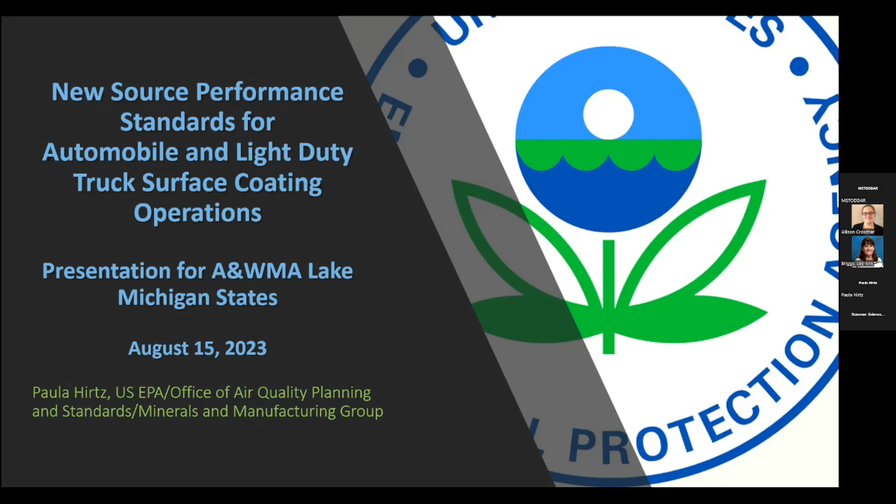For this presentation, it provides an overview of the automotive industry, and it summarizes some of the rulemaking development, the technical aspects, and also the tribal and demographic analysis. I thought I'd go ahead and add that in also, so we can talk about that.

This was a presentation for Region 5 for the permitters to walk through the plant, and there are a lot of new employees, so I got together with Region 5 and we provided this training to the new employees before they went out into the plants.

It was a little intimidating doing a review of the auto industry because it is very dynamic and it's experiencing a lot of growth. We did identify 45 auto assembly plants subject to the current NSPS and the auto NESHAP. Almost half of the 45 plants are in Region 5 states. Michigan, Ohio, and Indiana had a lot.

There's a lot of conversion to electric vehicle production. In 2022, we became aware of the construction permits issued to the Ford Blue Oval City mega campus in Stanton, Tennessee, VinFast here in Moncure, North Carolina, that's not too far from my house, and Rivian in Atlanta, Georgia. Also in 2021, Tesla started limited production in Austin, Texas.

So lots going on. At proposal, we determined one plant to be a small entity. It was the old Lordstown, General Motors Lordstown plant, which was then Lordstown Motors in Lordstown, Ohio. We determined it was a small entity due to the number of employees, but it was ramping up production, so that was just a temporary situation.

Lordstown Motors was sold to Foxconn in May 2022. And since Foxconn is not a small entity, we determined there's currently no small entities in the category.

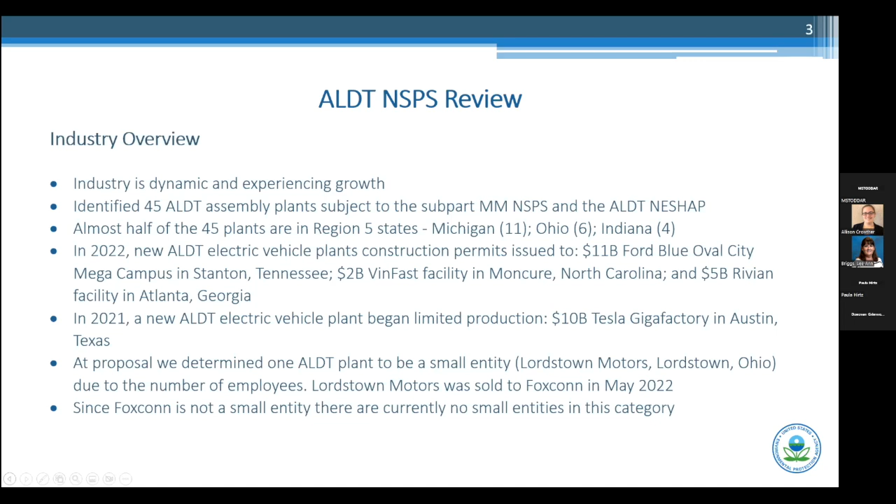As far as regulatory and emissions, most of the facilities comply with the NESHAP by using reformulated low-HAP coatings and not controls. But most of the facilities comply with the NSPS VOC limits by using control devices. The facilities emit more VOC emissions than HAP emissions from their surface coating operations due to the reformulation of coatings to lower HAP content. And also, we did delist a few HAPs such as MEK, which they use in their solvents.

VOC emissions, according to the NEI, are about 20,000 tons per year. A third of the plants we found had lower VOC emission limits in their permits than the NSPS due to new source review PSD BACT or LAER determinations. And these were mostly due to new sources that were constructed at existing plants.

These facilities emit more VOC than other criteria pollutants we determined, and we determined that the emissions are relatively well controlled. PM from paint overspray is well controlled by the filtration systems. Lead's no longer used as a pigment in coatings. The other criteria pollutants from combustion sources are relatively low compared to other source categories. And the source category was not a significant source of GHG compared to other source categories.

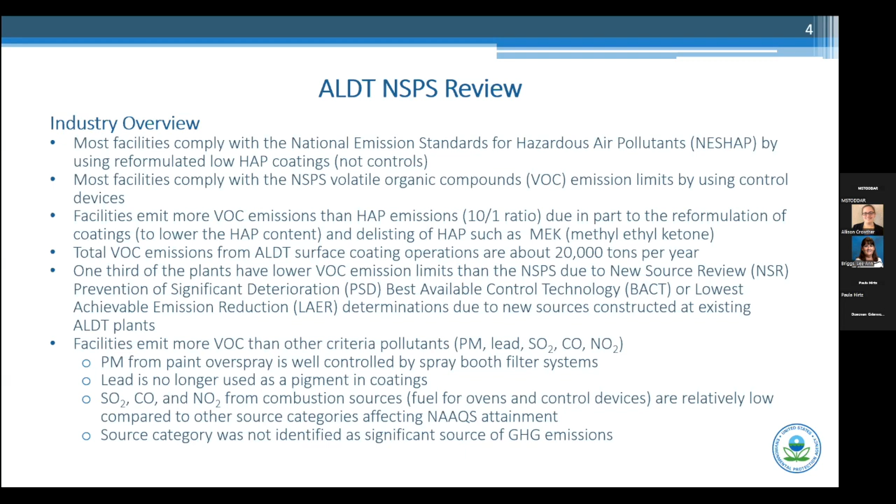A little bit about the surface coating operations. The coating process starts out with a zinc phosphate system, this is not subject to the NSPS or the NESHAP.

It proceeds to 3 primary operations that are covered by the NSPS and the NESHAP. It basically cleans the vehicle to remove particles from the body shop, and it provides corrosion resistance and promotes adhesion between the metal and paint. It's also referred to as a pretreatment or conversion coating.

The first operation that's covered by the NSPS and the NESHAP is the prime coating operation. It's an electrodeposition coating process. I don't know how many of you are familiar with automotive coating operations, but it's a tank, a large tank using a waterborne paint. The process is a dip tank, a series of rinses, and a curing oven, and it provides corrosion resistance and surface preparation.

Ford refers to it as the E-coat, GM the ELPO, or it's referred to as cathodic deposition in the industry, and it is an affected source.

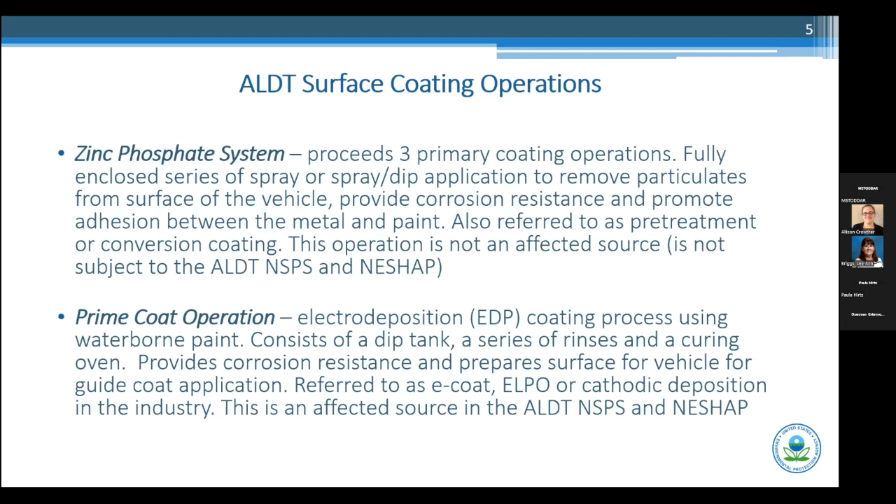The two major operations are the guide coat operation, or the primer surfacer as it's referred to in the industry. This is an affected source, and also the top coat operation.

These operations are fully enclosed, spray application operations. The guide coat prepares a surface for top coat, and they both consist of downdraft spray booths and ambient flash off zones and a curing oven, traditionally.

The downdraft spray booths act as a particulate control system to capture and control paint overspray and solvent emissions. The water containing overspray is routed to the wastewater treatment plant, and organics from the spray booth and oven may be routed to a control device for the guide coat operation - not always, but usually for the top coat operation. The guide coat may be solvent-borne or waterborne coating, and is applied electrostatically using HVLP spray guns with automation.

Basically the same process goes for the top coat operation, except in the top coat it's usually a long spray booth. A pigmented base coat is applied for the top coat operation, followed by application of the clear coat. That can happen in a longer spray booth or two separate booths.

There are other surface coating sources. Paint shop sealers are applied in the shop, in the paint shop. The sealer application is an affected source in the NESHAP.

There are solvents that are used throughout the shop. Solvents are added to all the paint to bring them to a specified viscosity, and solvents are used throughout the shop for cleaning and repair.

Operations that use solvent are subject to the work practice standards in the NSPS and the NESHAP. Then there is the paint mix area where the paint is stored, and the paint is circulated back to the booth from the paint mix area and back to paint mix. The paint mix area is subject to work practice standards too.

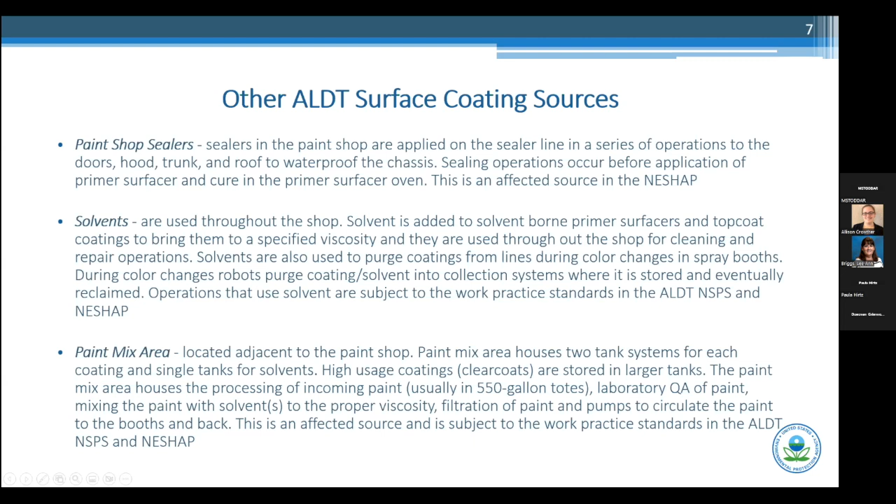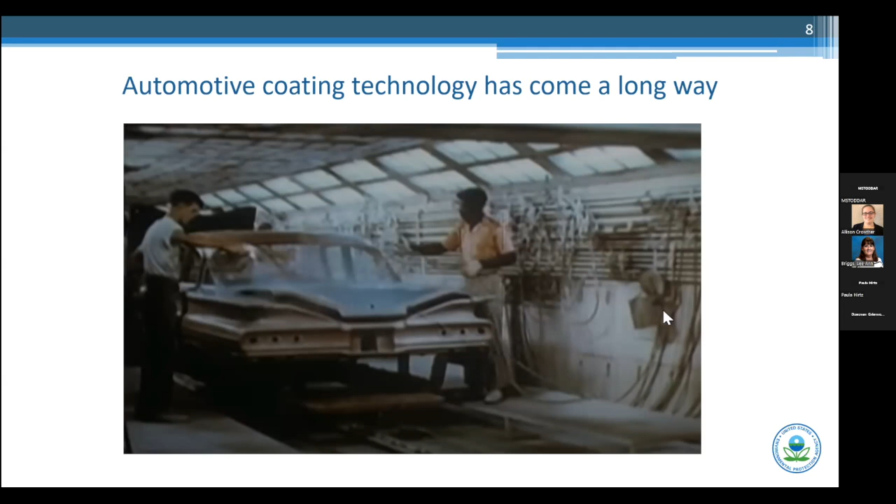I did ask Mark if we could take a little time to review this video, and I think it will work - I'm going to go ahead and give it a try. For about 6 minutes it will show the body shop. If you've never been in an auto assembly plant, it's pretty fascinating. It shows the body shop and the coating operations. I'll go ahead and start it, and stop it before it continues - you can watch the rest of it. It goes through trim and chassis if you can watch it later.

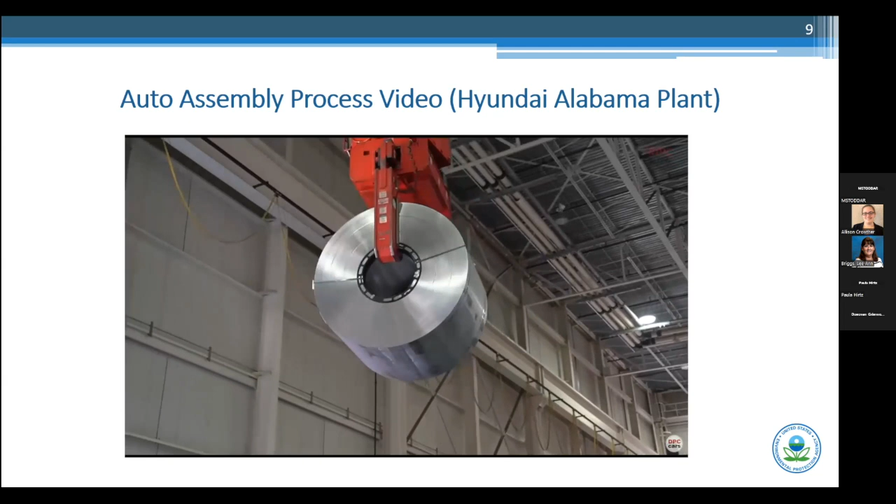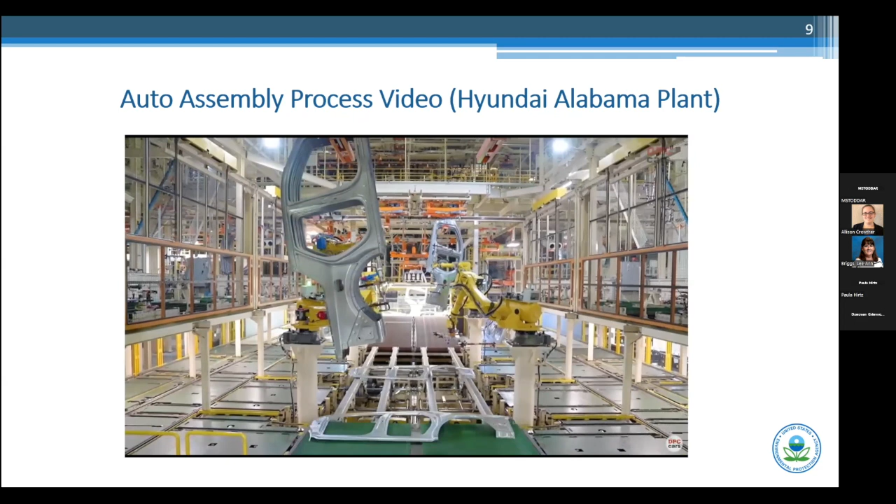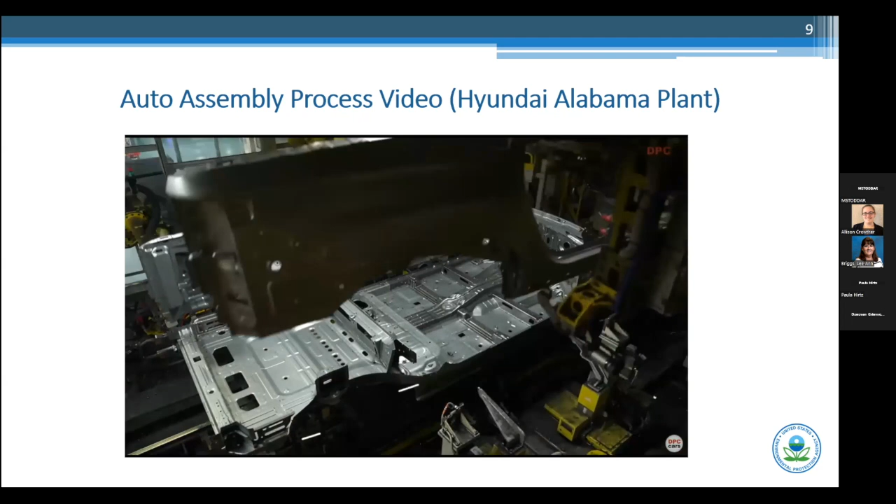The Santa Cruz marks the first HMMA-built vehicle that originated right here in Montgomery, Alabama. This vehicle is not being built anywhere else in the world. My fellow team members, we are the parents of this innovative, stylish, and functional sport adventure vehicle. It's truly a limited edition that we can all call our very own. Vehicles produced by HMMA will be compared to all others. We want to show the world that the best quality and safest cars are produced right here in Montgomery, Alabama, and to be recognized as the best automotive manufacturing plant in North America. The Santa Cruz is unlike any vehicle on the market today. I have had the pleasure of driving one myself for the last several weeks, and I'm now more excited than ever to present this sports adventure vehicle to our customers. The many options of the open bed combined with the comfort and security of an SUV is going to appeal to drivers in a whole new way.

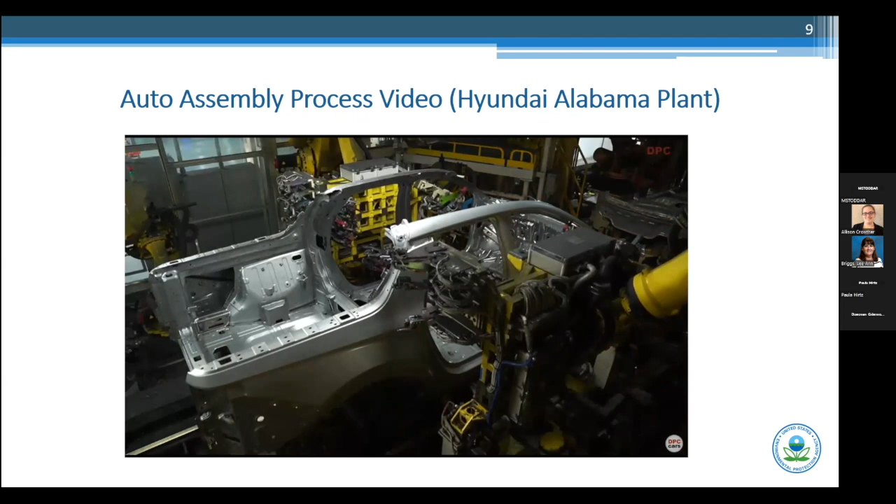There's robotics for the major welds now.

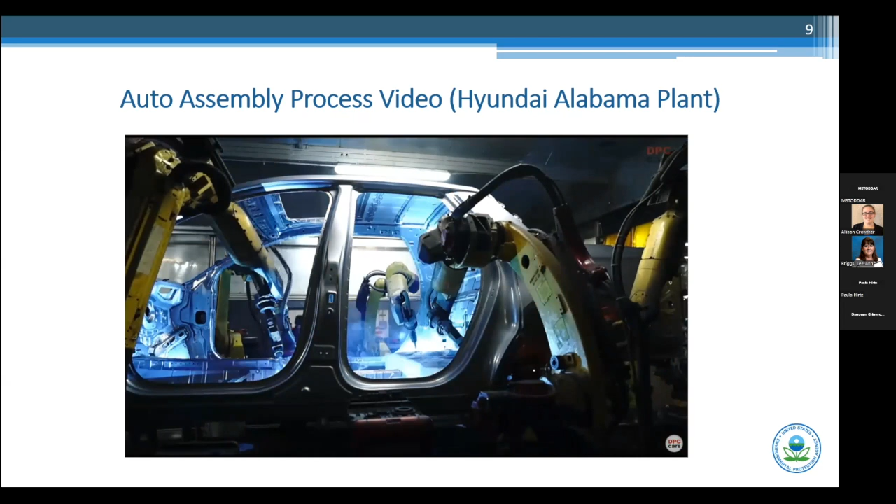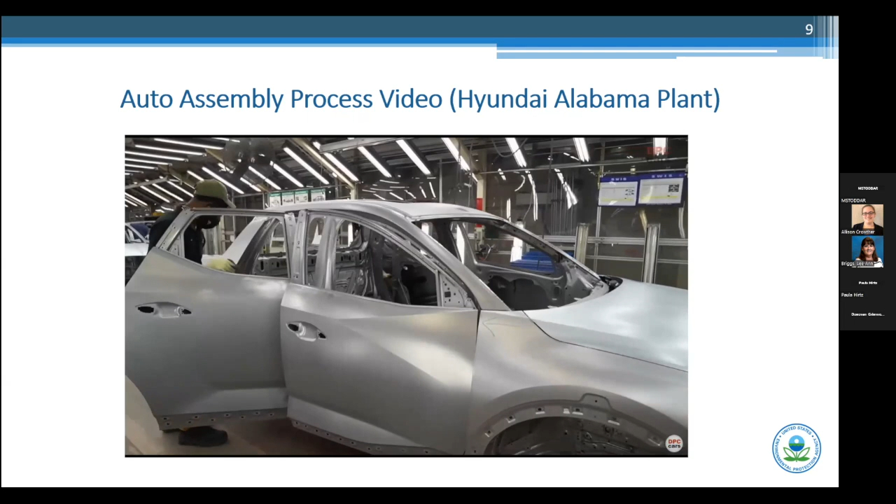But they still do a few things manually.

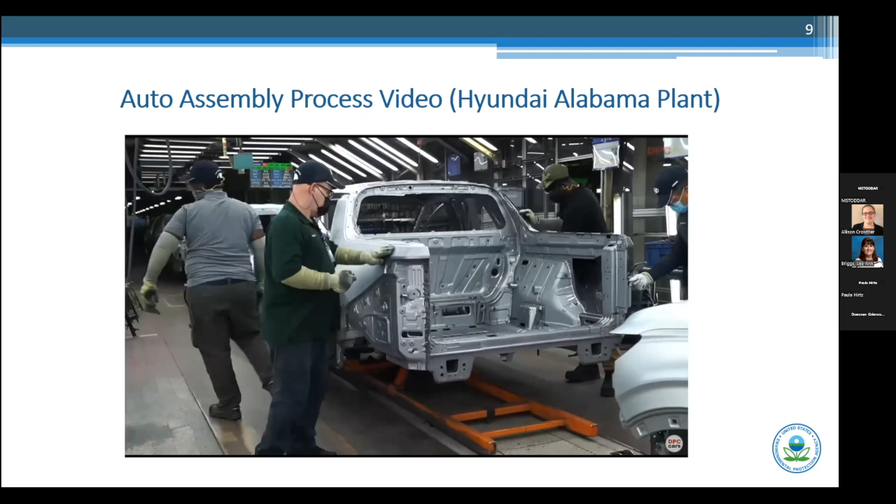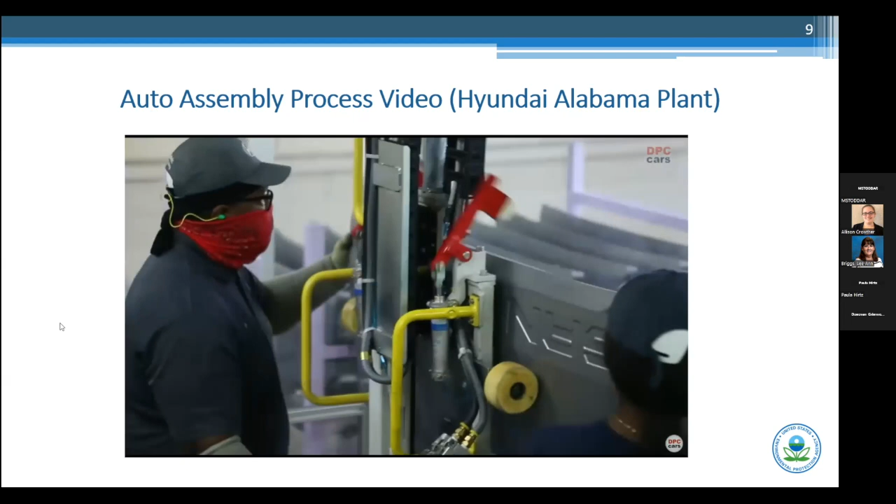They don't have to oil the parts if they stamp them on site. When I worked in the industry, the parts were oiled, and that was always a problem for painting. And of course, now these can be aluminum or sheet metal.

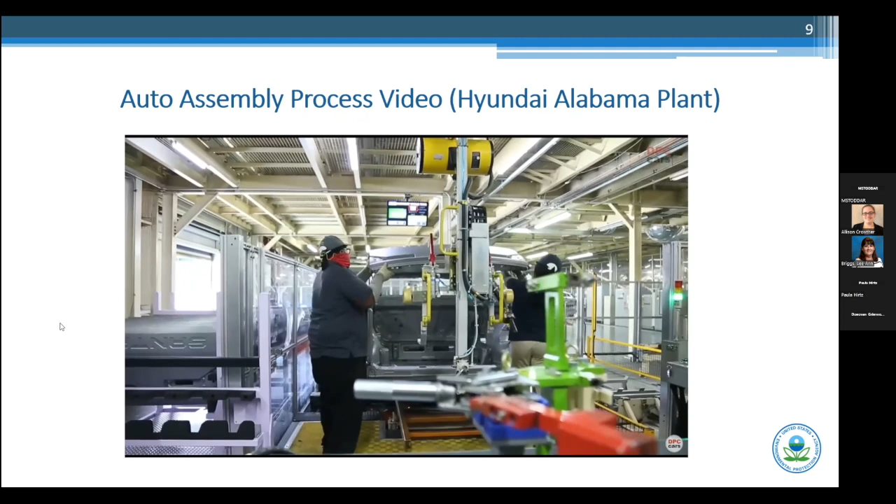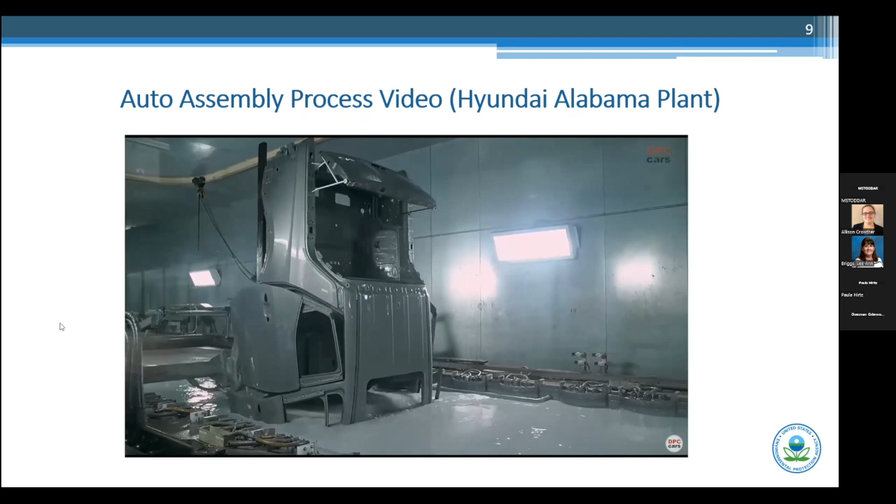Okay, so there's the E-coat process. It's gone through the zinc phosphate process, and they dip it so that it gets into all the recesses of the vehicle, deep into the interior to prevent rusting.

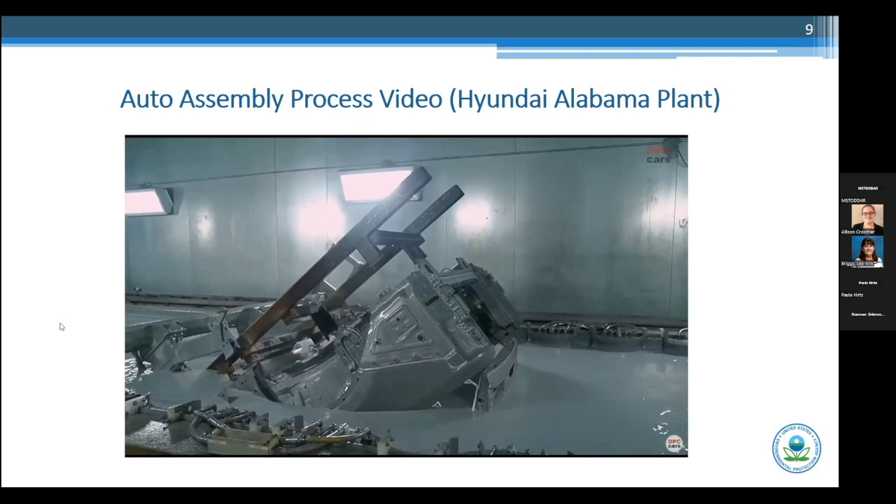And that's all that you can see - those are the cells on the side. The body is charged negatively, and the cells on the side are positive, and it draws the waterborne paint to the surface.

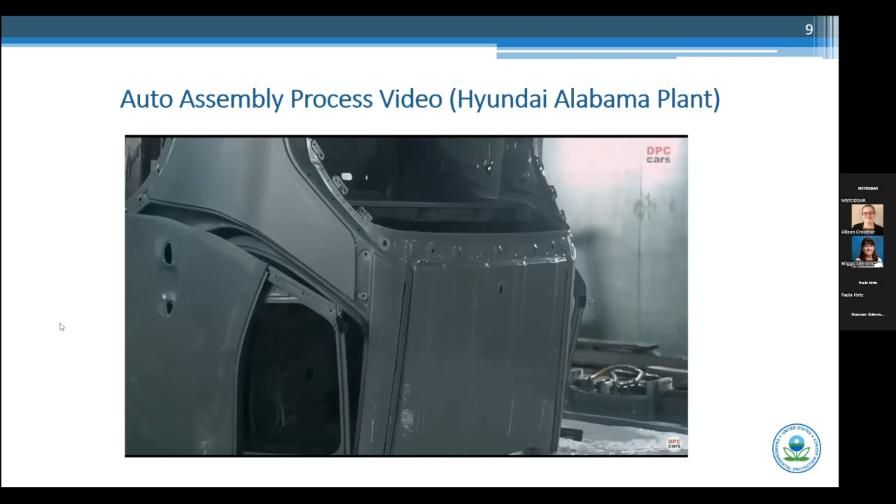Usually the dip tank is not controlled. It doesn't have any controls. There's a couple of plants we found where the dip tank was controlled, but we found that to be not cost effective for the NSPS.

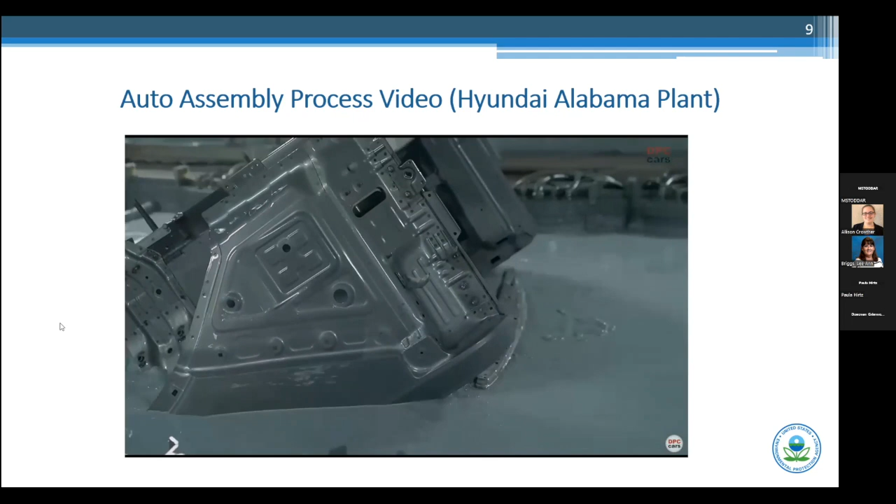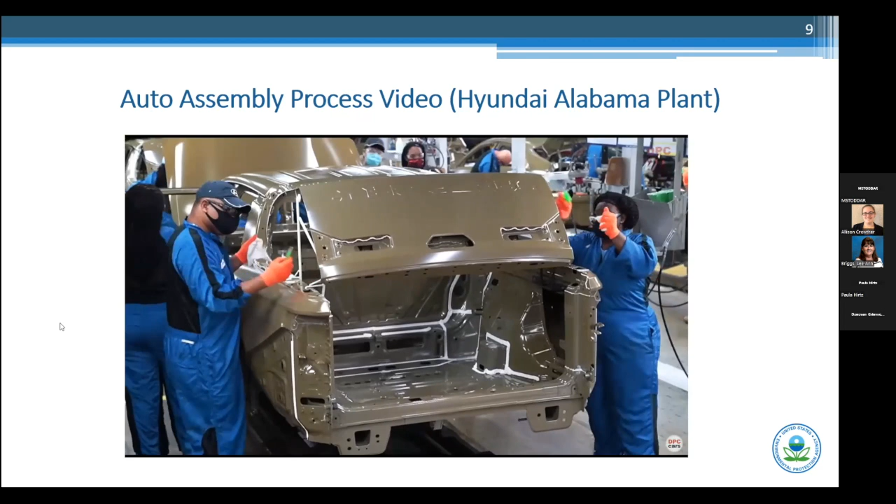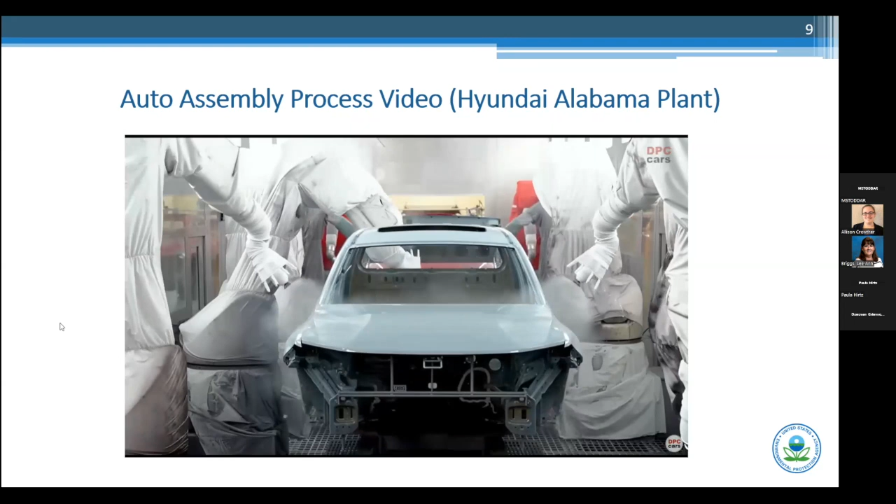And the top coat, this looks like it's spraying this white color. And those are Behr bells, rotating Behr bells, BEHR bells. So it's a lot more efficient process now. Everything's programmed.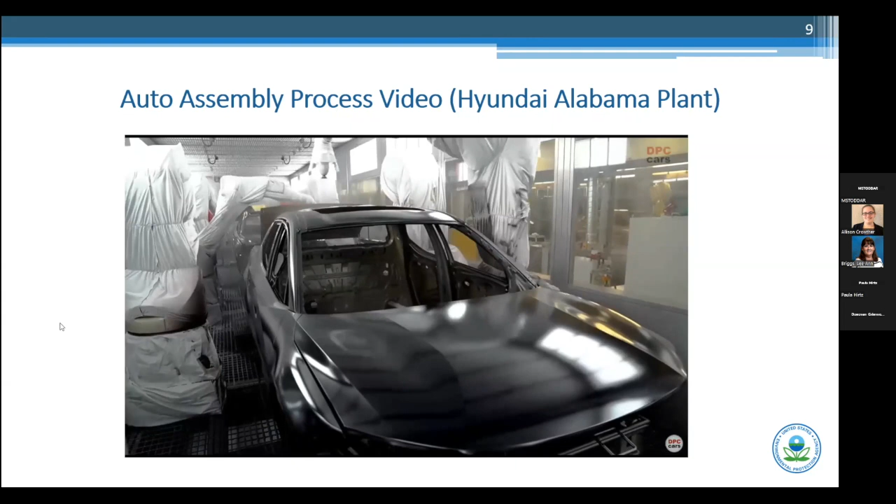That looks like, I'm not sure if that's clear coat. It looks like clear coat on top of the black body, yeah. But everything is wrapped, so it protects the robot, and it doesn't have to be cleaned with solvent.

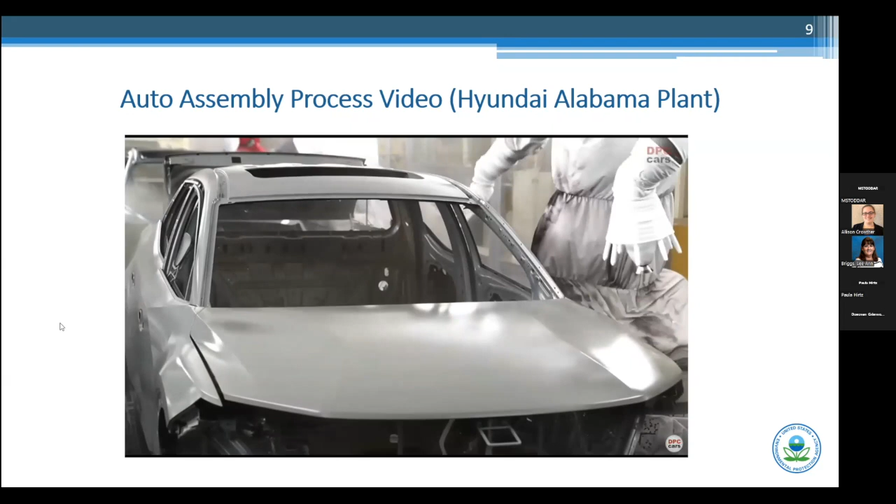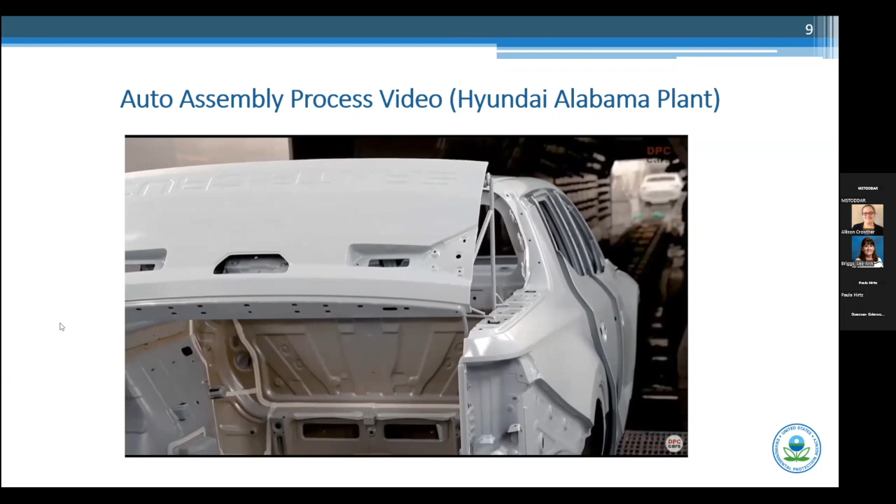So there's still manual sprayers. They'll open the doors and spray the inside of the door jambs, but it's robotic now. A lot of robots now, and I think that was a subject on this morning's news.

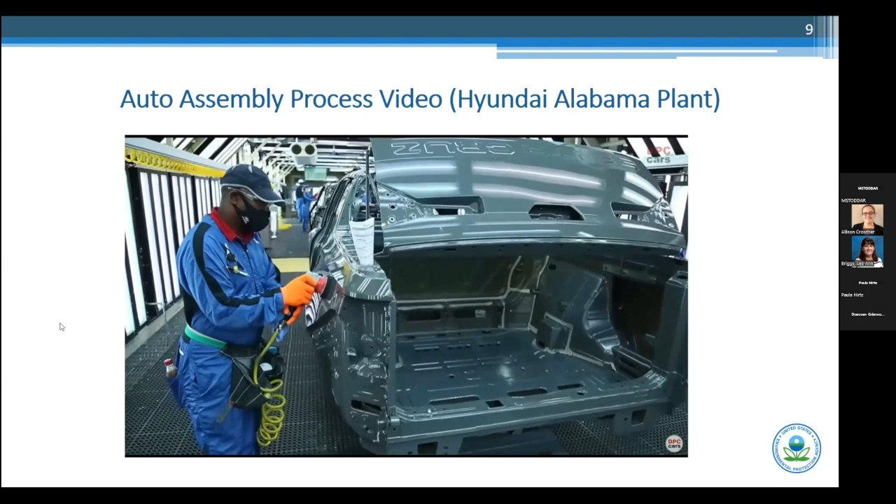This is inspection and spot repair. And the solvents that are used to wipe down, or any solvents used by these folks, have work practices.

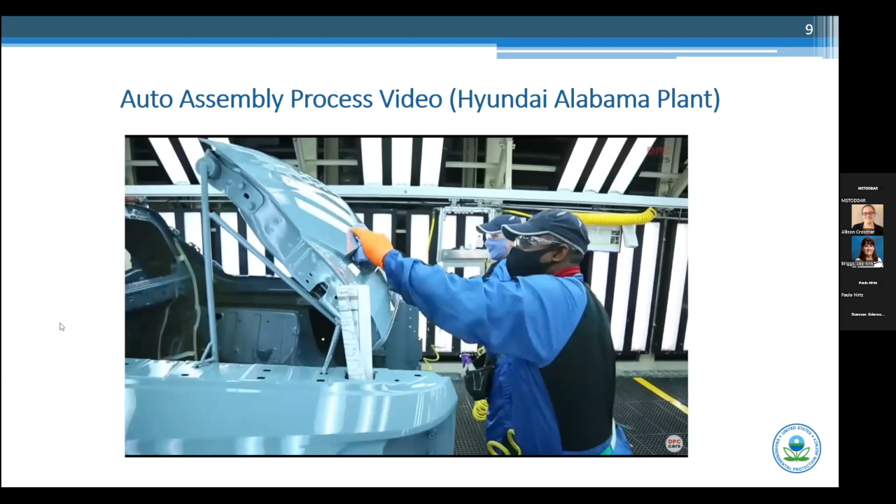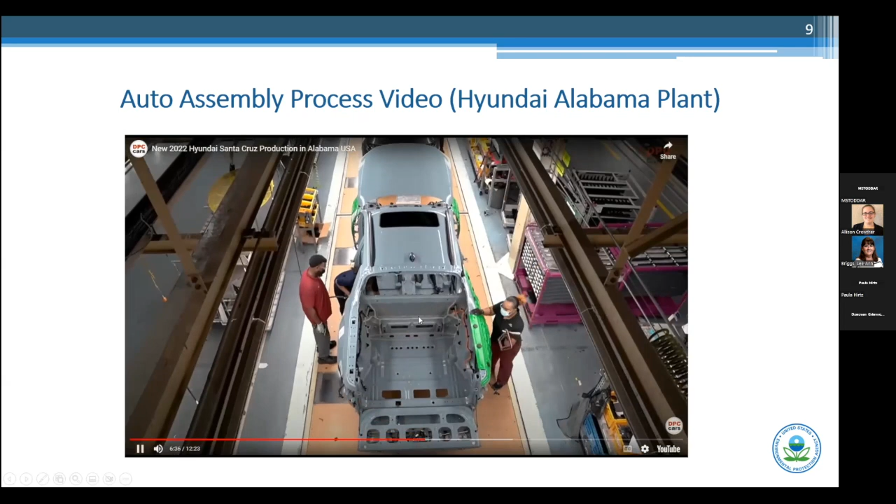And I think I'll go ahead and stop it there, but you can watch the rest of it. From here on out, it goes through the rest of the plant, and it has protective covers on the paint. And the doors are put on by robots, so that's pretty fascinating to watch too.

Okay, great, that worked.

So as you can tell, there's been a lot of surface coating developments. In 1980, the coatings and the coating processes were still under development, and some plants couldn't meet the NSPS limits. The industry converted to base coat, clear coat paint instead of waterborne paints, as we had anticipated when we set those limits. There were innovative technology waivers issued for 9 plants because they could not comply with the NSPS limits for top coat. Today, plants are achieving limits that are much lower than the NSPS levels.

Back in 1980, they were still using a lacquer, and they were using the 2-stage enamel top coats. They used mostly solvent-borne coatings. Only 2 facilities used waterborne coatings at that time. There was no control of the prime coat operation, but the top coat operation was controlled. And they actually did have manual and automated electrostatic spray application back then. Today they have robots.

Clean Air Act Section 111 requires a review of the best system of emission reductions, or BSER, every 8 years. Of course, we missed that. It was more like 43 years since we took a look at the auto NSPS. We did have a consent decree order. We actually had a consent decree proposal deadline and final deadline.

Here, just kind of added the BSER requirement under 111B1B and the general provisions definitions of reconstruction and modification.

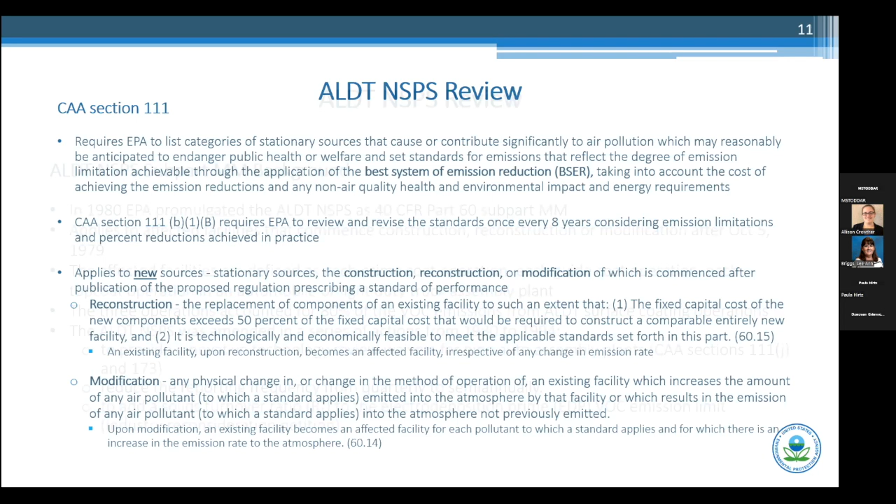So the NSPS Subpart MM had specific applicability to the 3 primary operations in assembly plants. And it applied to facilities that commenced construction, reconstruction, or modification after October 5th, 1979, which was the proposal date. The 3 operations account for 80% of the VOC emissions.

And the NSPS was amended in a series of actions. First of all, to provide the innovative technology review waivers, to reduce the reporting frequency from quarterly to semi-annually. And then the industry petitioned us to add a solids turnover ratio to the electrodeposition prime process. And that was mostly to account for periods of non-production.

Subpart MM emission limits were based on control scenarios for both solvent-borne and waterborne coatings. Also based on no control of the E-coat and guide coat, and it contained various exemptions. So if you used waterborne, basically no controls were required. Waterborne was thought of as a pollution prevention coating or practice. And then alternative 2 was control of not the guide coat operation, but the top coat operation, both the booth and the oven.

The NSPS also exempted plastic coating of all plastic bodies and body parts on separate lines. There was no separate limits for modified sources.

The industry would like less stringent limits for modified sources. The original NSPS did not have those separate limits, and they had some breaks on model changes. Those were not considered to be modifications. The NSPS required use of default transfer efficiencies in the rule. It did require that emission limits be met at all times, which is good. A lot of NSPS don't have that condition.

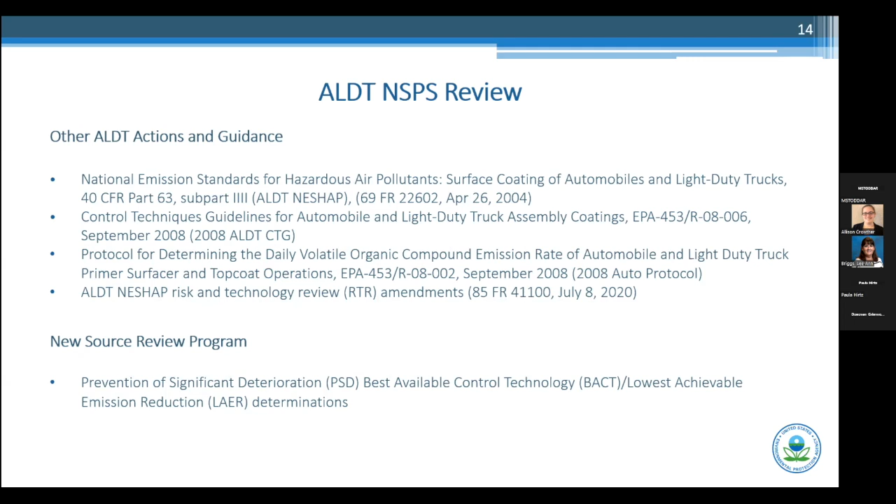The new Subpart MMA was proposed in May 2022 and had a 60-day comment period. As you can see, the VOC emissions are much lower, and the updated BSER describes how auto plants are achieving the emission limits and how the coating configurations really vary. The prime coat, guide coat, and top coat limits are very low. BSER for the new subpart was based on one control scenario for the prime coat and top coat operations, and two equivalent control alternatives for the guide coat operation, depending on the use of waterborne or solvent-borne coatings.

The configurations vary widely from plant to plant. We basically described the prime coat operation at plants that were achieving the 0.23 level above - this is what they did, they basically control the oven emissions. For the NSPS for MMA, this is what the BSER is to achieve the 0.23. Guide coat had a couple of different scenarios, one for waterborne, one for solvent-borne, and top coat is both waterborne and solvent-borne.

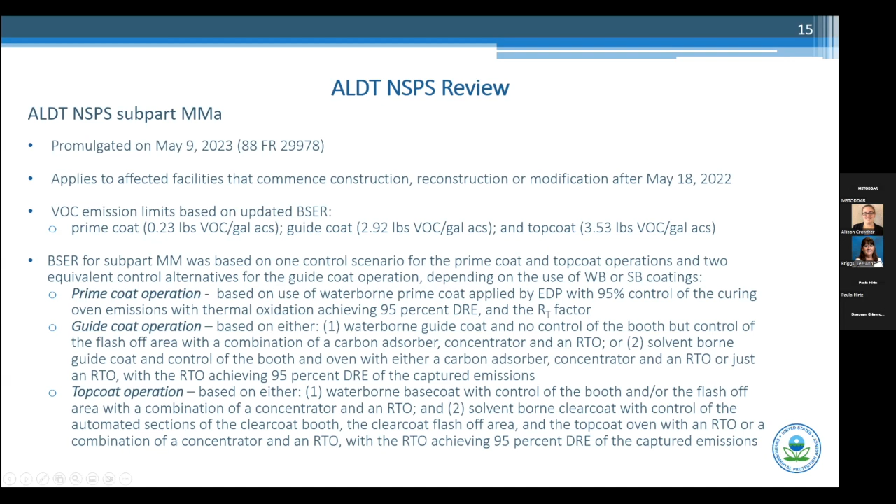For MMA, we allowed no exemption for the coating of all plastic vehicle bodies. Really, the only all-plastic vehicle body we were aware of was the fiberglass Corvette at the Bowling Green, Kentucky plant. So they will be subject to MMA if they modify, build, or reconstruct.

We added requirements to harmonize the NSPS with the NESHAP. We added work practices to minimize VOC emissions. We updated the control devices and all the testing and monitoring requirements. We required periodic testing of control devices. We revised the transfer efficiency provisions so that plants have to test the transfer efficiency - they can't refer to just a default transfer efficiency anymore. That's the same as the NESHAP.

We revised the record keeping and reporting requirements. We added electronic reporting. We clarified the startup shutdown malfunction provisions. And we added a whole ton of new test methods and incorporated ASTM methods by reference as alternative test methods.

The only thing we did to the existing Subpart MM, we call it the legacy Subpart MM, is that it applies to affected facilities that commence construction, reconstruction, or modification after 1979 and before the date of proposal for MMA. We did add electronic reporting provisions to MM so that plants currently subject will submit electronic reporting of their semi-annual compliance reports and test results if they do testing.

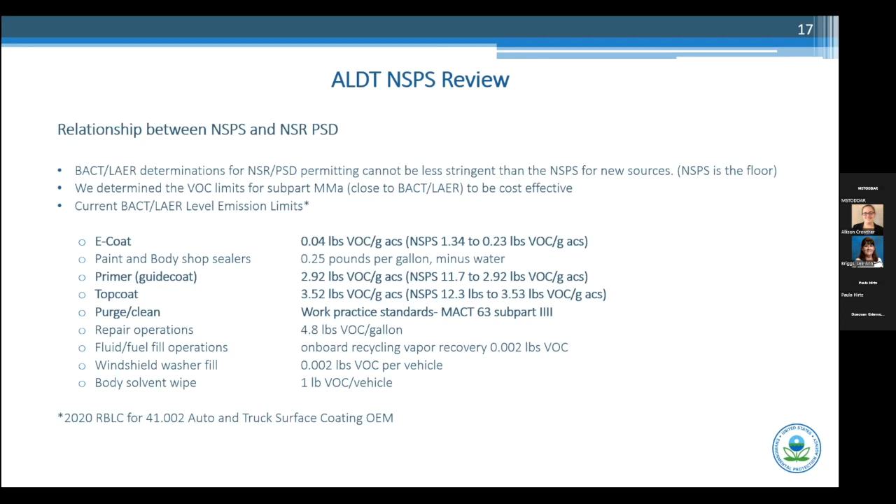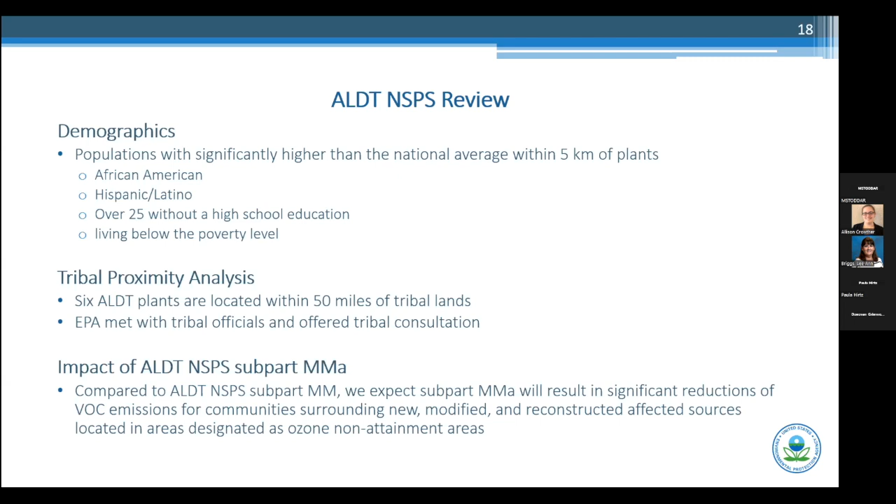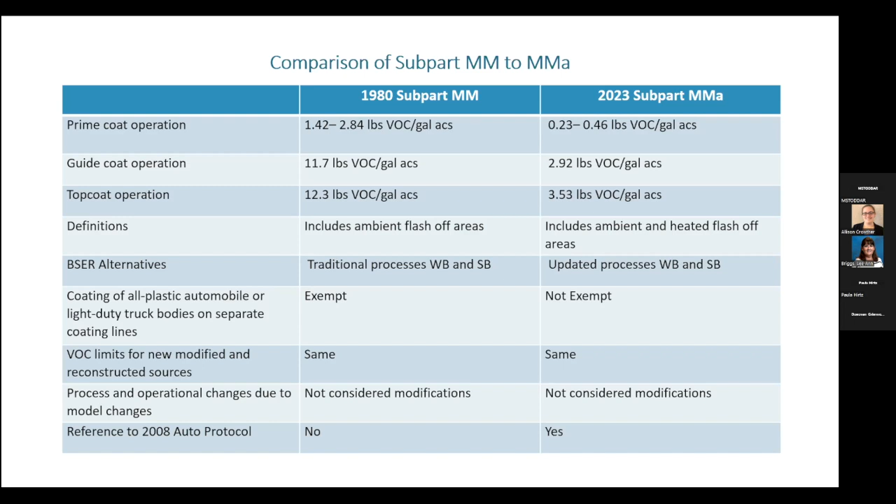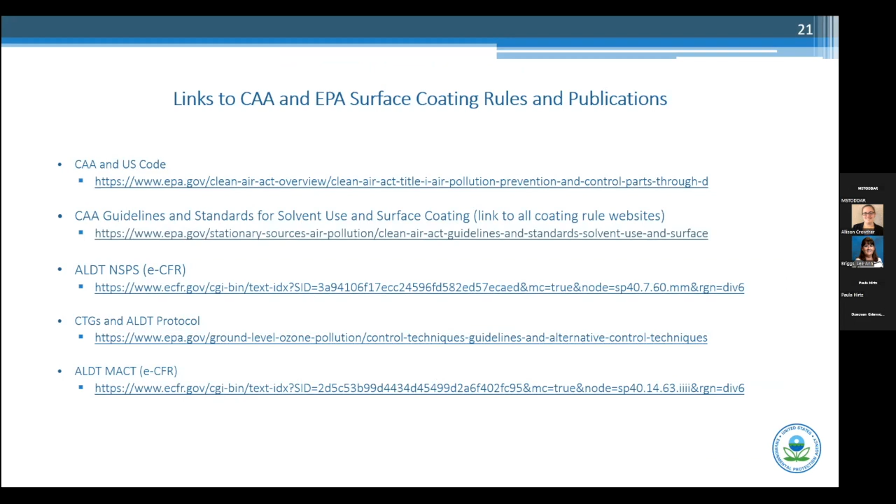That's it. I did want to thank my contractor, ERG, Brian Palmer, who did a lot of great work for me. And I wanted to especially thank Dino Blathris, who works at US EPA Region 5 in the permitting section, and Bob Burns with Michigan Department of Environment, Great Lakes, and Energy.

I also included some additional background information, prepared for the permitting folks. It has the Clean Air Act requirements we had to consider and a summary of the CTG. I won't go through it, but if you want to know more about what's required and what we had to review, it's there.

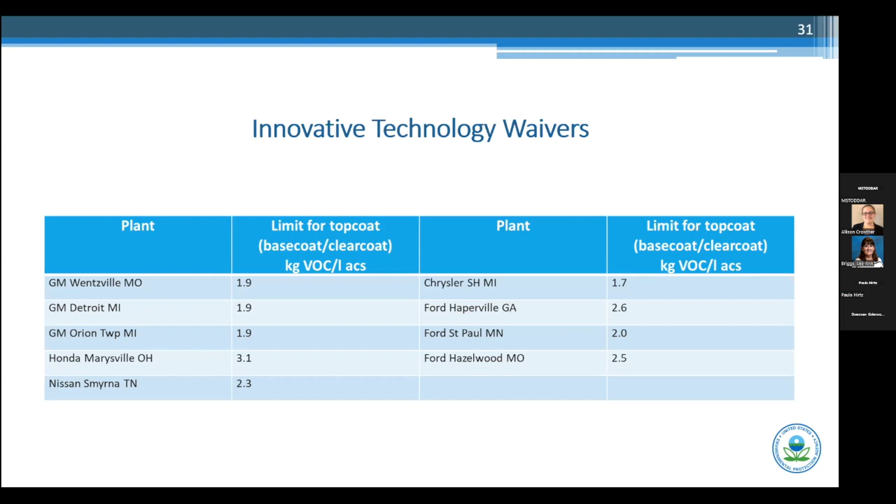For these innovative technology waivers, the facilities had closed in 2006. This is in kilograms per liter, so it's a little different than what I've shown you in the presentation, but I'm going back through that.

Any questions? Yeah Paula, we do have one from Sherry Waldron: is the transfer efficiency a per gun requirement or a type of gun, and was there a lot of work that indicated the transfer efficiencies would vary a lot?

It's per operation, so you might have a variety. When you look through the rule, I believe the NESHAP is the same way. But for the NSPS, say for the guide coat operation or the topcoat operation, you may have different guns that you use. For topcoat, you can have electrostatic, HVLP, manual, automatic, and even conventional - believe it or not, the industry assured me there's still an application for conventional. Basically it's an averaging of transfer efficiencies used on that operation.

I was going to say, believe it or not too, for metallics - I don't know if this is known - the metallic flake, if applied with electrostatics, disrupts and causes a darkening. So for the metallic coating, they have to go back over with conventional non-electrostatic spray before the clear coat, so it brings it back on color. That transfer efficiency, which is low, gets averaged in with the other transfer efficiencies that are high, and they're all averaged together.

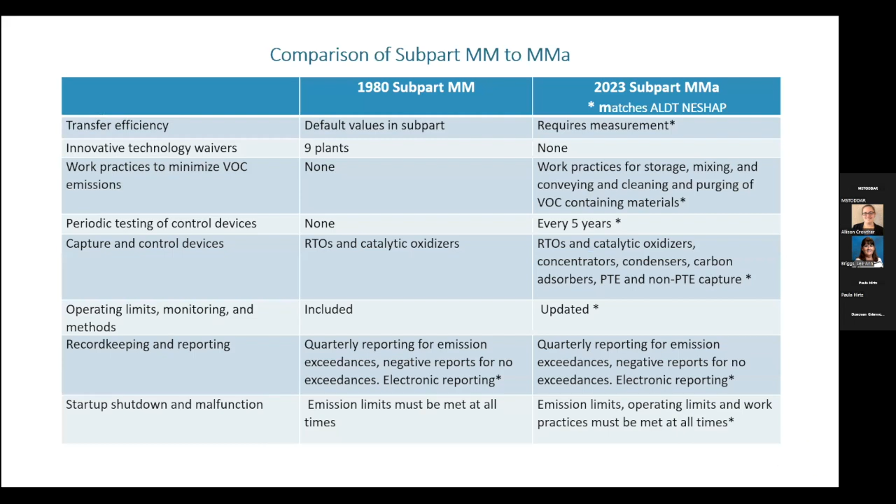Anyone asking questions other than me? Tony is asking, how does one get an innovative technology waiver? Are those available for NESHAPs as well? I'm not sure about 112. I suppose there is some provision, we could go back to it.

The industry actually asked me if that was still available, and it is, under 111. Here it is, 111(j) and 173. If you read Subpart MM, it actually has 9 plants listed in the rule. It was added as an amendment, and it has a different limit, saying they were permitted temporarily to emit until they could achieve the NSPS limit.

I believe the NSPS was promulgated in 1980. 1984 was about the time the waivers were granted, and then I think it was 86 — they had just a couple of years, or until they could meet the NSPS limit. So it was a little bit open-ended. It was so long ago though.

I had concern about that at first, but when we took a look at the semi-annual compliance reports for each of those facilities still operating, we found that they were way below NSPS limits now, and that's why the VOC limits are so low. We saw that these plants, which couldn't meet the limits at one time, were now way below, achieving what we proposed, which helped solidify that those low numbers were attainable and achievable by many.

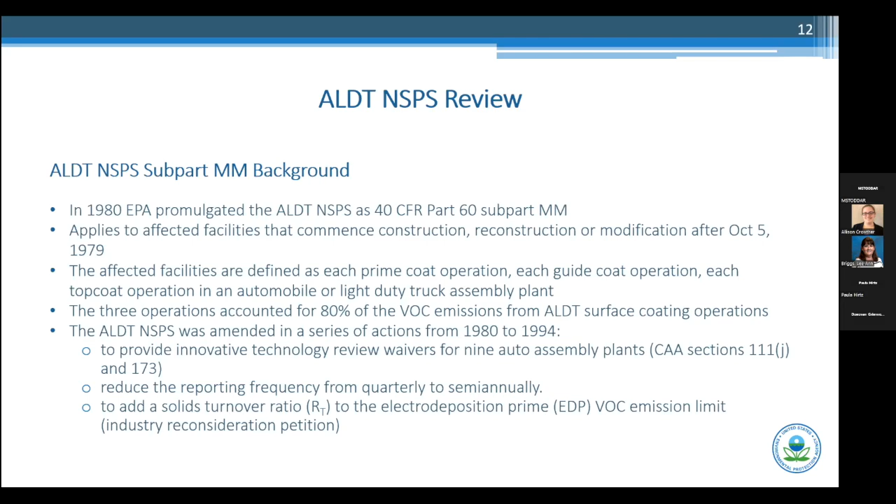Oh, did I sign off? Yeah, I can still hear you. Okay, let me.

Yeah, I'm not sure about that, we would have to look into it. I would think that the emissions would be more concentrated, into one location, if you're doing the major body welds, and maybe they are more concentrated, coming from that particular station instead of throughout the body shop. I'm not really sure about the body shop operations though.

Yeah, everything is becoming more efficient at auto assembly plants, I do believe though. I'm thinking with robotic welding, you could be more precise, whereas a human being might be prone to some degree of error. Absolutely.

The main goal in the body shop is you have the specifications for the gaps. I can remember the bodies coming up, and we could not seal the gaps because they were so wide. We put the sealer in the gaps to prevent water leaks, and sometimes if they were off spec, they would be so wide they'd be difficult to seal. So there was a lot of variation. Then I'm sure there's less variation with the robots. Yeah, I would tend to agree.